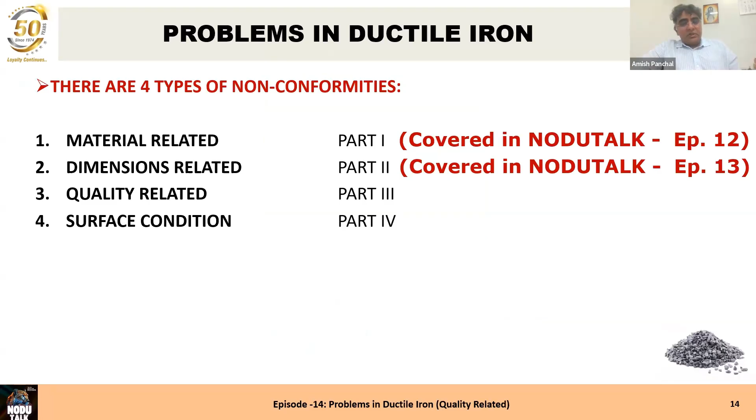Friends, starting with today's 14th episode of Nodutalk, we are going to cover problems in ductile iron which are quality-related. In the past two issues, we have covered other topics on problems in ductile iron. Today's topic is going to be covered by Mr. Henderieckx, who previously covered material-related and dimension-related problems in ductile iron.

This is the content of today's topic: problems in ductile iron that are quality-related. We are going to cover porosity, air or gas inclusions, general inclusions, cracks, destructive testing, and NDT testing. Over to you, Mr. Henderieckx.

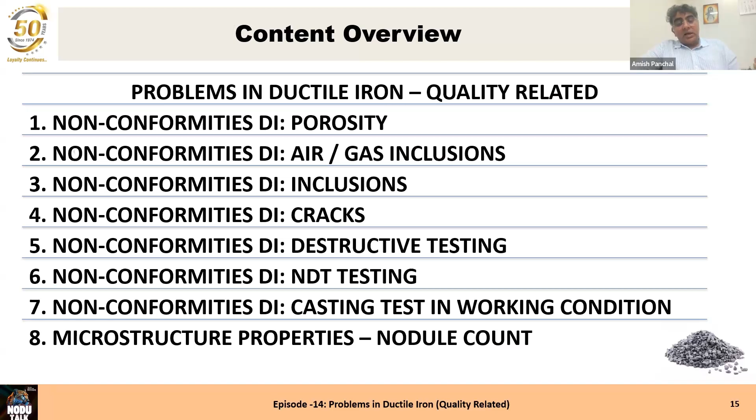Good evening everyone. Today we will talk about the integrity of the casting section, not about the surface but mainly the section. The requirements about the casting sections are given by the customer and depend on the application of the casting. The requirements come on top of the material requirements, and the quality has an effect on the strength and fatigue resistance of the casting, because the material requirements are just about the material, but the quality of the section can influence it very, very much.

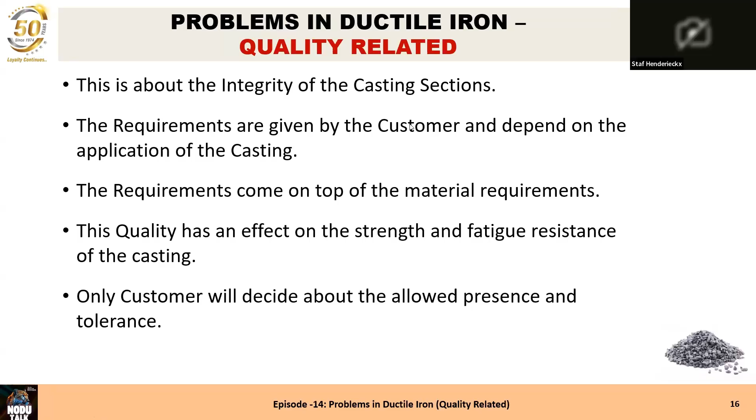Only the customer will decide about the allowed presence and tolerance of quality-related items. The foundry has to accept these requirements as well as the testing methods. I always advise you to ensure that the testing method is available and agreed upon. A requirement stating the casting must be free of any defect such as porosity, inclusions and cracks is never acceptable for the foundry, because nearly no casting will meet this requirement.

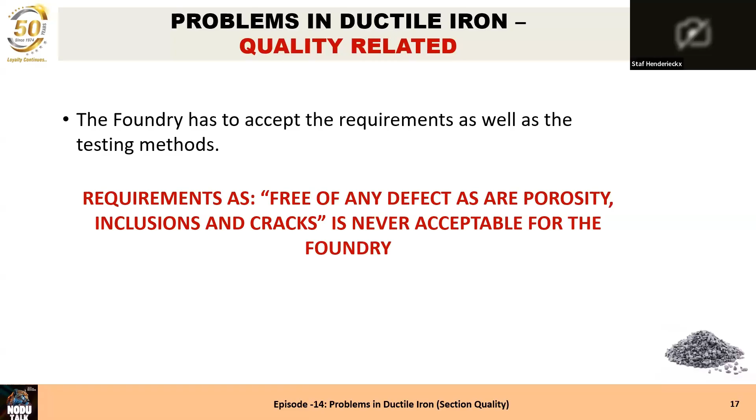It is the same all over the world. A customer who doesn't know anything just likes to put this sentence on his order sheet and his requirements. Please discuss this with the customer before starting. What features do we have mainly?

That's porosity, air and gas inclusions, other inclusions and cracks. These are the four major items involved, and the testing is destructive, non-destructive, and a casting test in working conditions. At the end, we will add nodularity and nodule count because some customers can ask for it, although it's not available in any international standard.

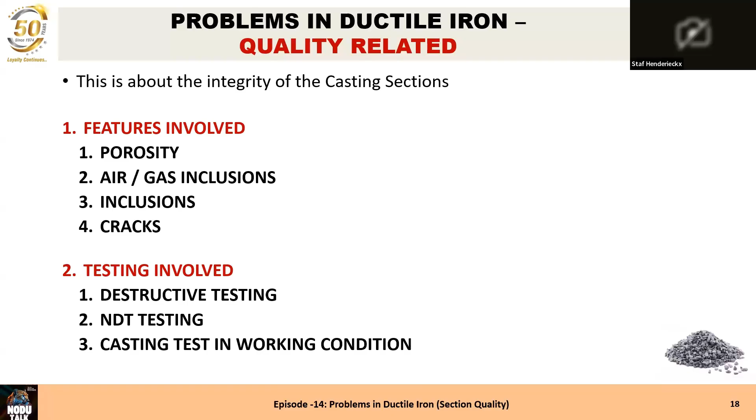So porosity is an area without material due to non-compensated volume shrinkage during liquid cooling and solidification. Every material shrinks during cooling and mainly also during solidification, and if that's not compensated, it will give a porosity.

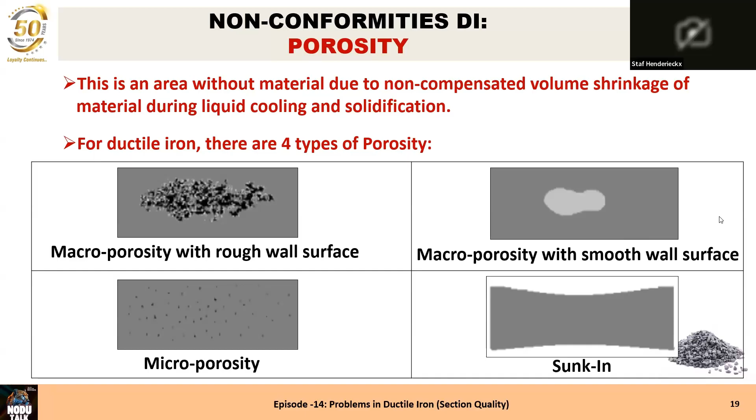We have macro porosity with rough surfaces, and macro porosity with smooth surfaces—we'll come to the difference later. We also have micro porosity. And we have sunk-in defects, which is something that's mostly not recognized by most customers and foundries as a shrinkage or porosity, but it is.

Here we can see some examples of it on a pump casing—a macro porosity and a detail from it. It's small, but it's macro porosity, and under it there's a rough wall surface, but that's not the porosity itself. We can also have open cavity when the porosity reaches the surface, sponge-like porosity, rough irregular wall surface, and surface depression as already mentioned.

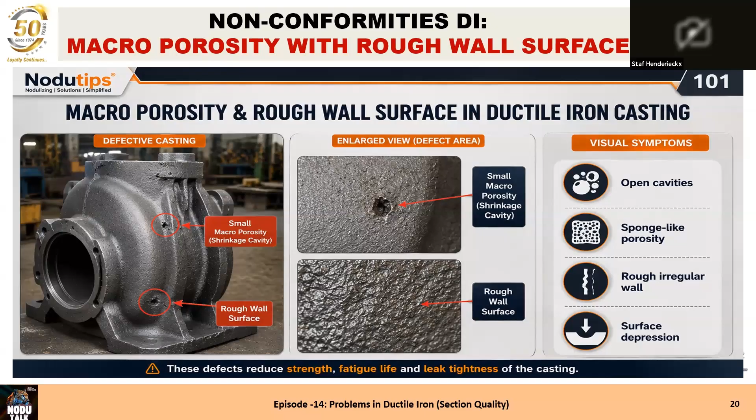Porosity will reduce the strength and fatigue life, but mainly also the leak tightness if used in castings like a pump casing or a valve. Here you see some real porosity—macro porosity with rough wall surface.

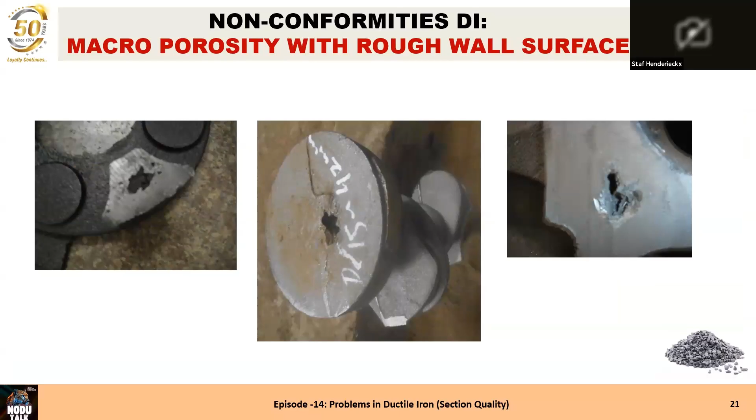This mostly happens when the carbon equivalent is lower than 4.3, but can also happen somewhat higher. Rough surface is mainly when the carbon equivalent is less than 4.3. Here you can see it's many times located in a hot spot, because the hot spot is the last solidifying area, and if there is no compensation, then we have that porosity.

It's for that reason due to insufficient riser activity. If the riser does not deliver feeding metal until the last second, it will lead to porosity, and it's mostly with a lower CE, lower than 4.3.

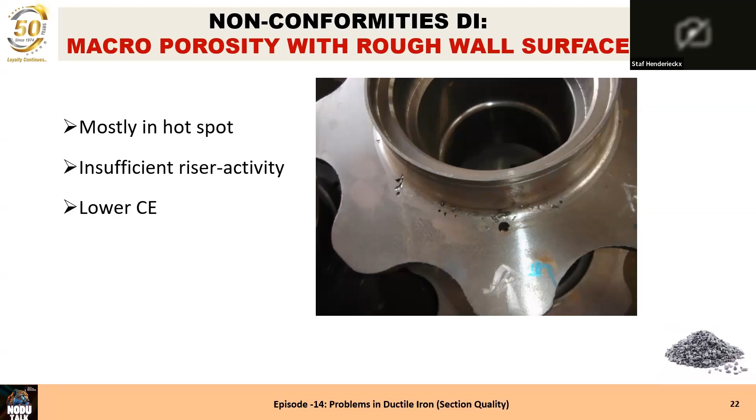If we make an inventory of possibilities: improper feeding and rising is, of course, the main root cause of a macroporosity defect. It's in a hot spot. When we have a hot spot, many times it's not connected with the riser, and if it's not connected, it can have this type of defect.

A low nodule count will also increase this shrinkage tendency, because a low nodule count indicates a low feeding capability, which increases the tendency. High shrinkage tendency can also come from high carbon equivalent and alloy levels, but this is not with a rough surface—it will then get a smooth surface, which I'll come to later. Improper inoculation, of course, if you have improper inoculation, you will have a low nodule count, and a low nodule count increases the tendency.

Improper pouring temperature is another cause, because if the pouring temperature is high, we first have liquid metal shrinkage between the pouring temperature and the start of solidification.

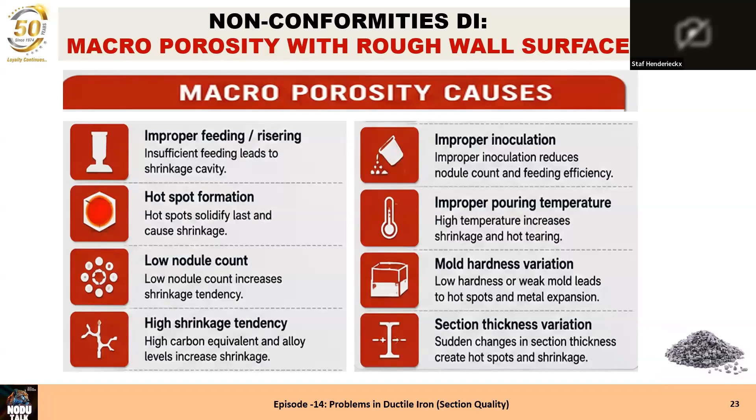When the mold is not strong enough, not hard enough, that expansion will push out the mold, and that extra volume can lead to porosity, macroporosity appearance. Then the section thickness variation - when we go from a thick section to a thin section and again to a thick section, that will block the feeding capacity of risers, and if the feeding capacity of risers is blocked, we can have this macroporosity without any problem.

We have other possibilities. Sand erosion: weak sand is eroded by molten metal flow. That's a rough surface, but it's not a porosity as such, and it will not happen in the center of a section. A poor mold finish - that's again about the surface, and that will be covered in the next session. Coarse sand grains give a rough surface, of course. Low mold strength gives a rough surface.

Metal penetration can occur if the mold is not rammed properly, then the metal can easily penetrate, and if there is no good coating on it, it will penetrate. Excess pouring temperature will also give a rough surface, and high turbulence of pouring will also give a rough surface. So this is a rough wall surface.

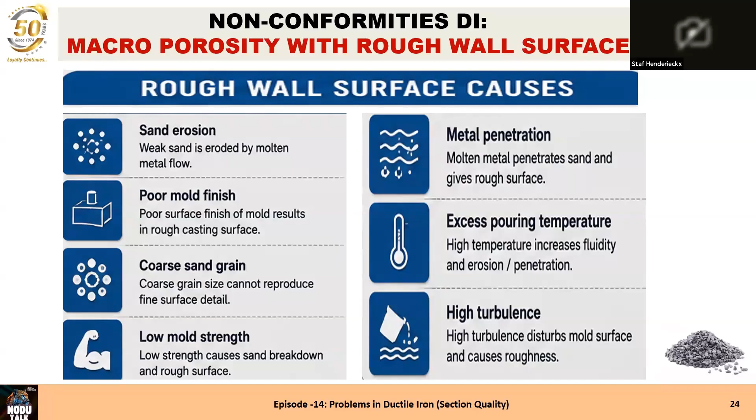It's not really porous. To prevent the macroporosity, on the left in picture 1, we can see it's the riser. The riser is the main solution for macroporosity. The gating system is another factor with influence.

Why? The gating system will decide where the hotspots will be, besides the section differences. Very close to a gate, there will be a high temperature, and it's very important to improve the gating system so that the riser can feed it when necessary.

Pouring temperature is not only a matter of porosity, but also a matter of energy and cost of the casting. Going about 50 to 70 degrees above liquidus temperature is enough for good castings. If you go higher, you will lose energy, you will lose money, and you will increase the tendency to make porosity.

Inoculation is very important because it will decide about the nodule count, and the nodule count is very important for having good feeding all over the casting, because nodule count is directly related with the fluidability and the possibility of the riser to feed all the areas.

And of course, the casting design - you have to discuss with the customer that there are no abrupt section changes, and that the wall thickness differences from one area to another are smooth and not abrupt.

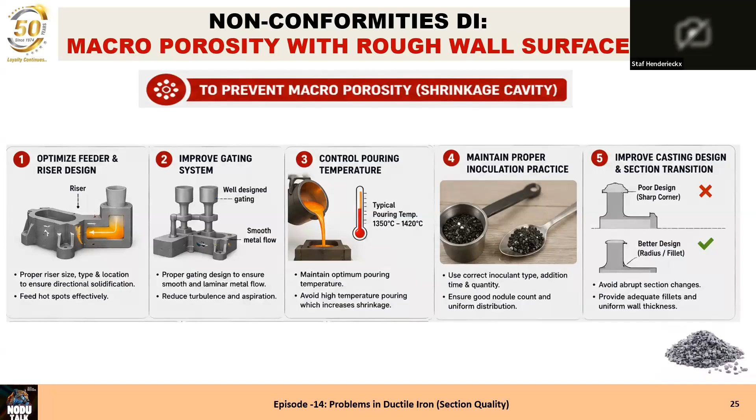Mold hardness - you must make sure it's strong enough, and mainly for green sand you must be assured that the sand is rammed properly. But also in chemical bonded sand, there can be areas that are a little difficult to reach, where the sand is then less good than in other areas, and this can cause problems.

Proper sand quality and grain size of the sand decides the strength of the sand without any problem. Facing sand and coating - the thickness of the coating must be adapted to the thickness of the casting, and it must be applied properly.

Again, pouring temperature and pouring velocity. Pouring velocity matters because when you have too high a metal speed, it can remove some sand and cause a problem. Again, a well-designed gating and runner system is important.

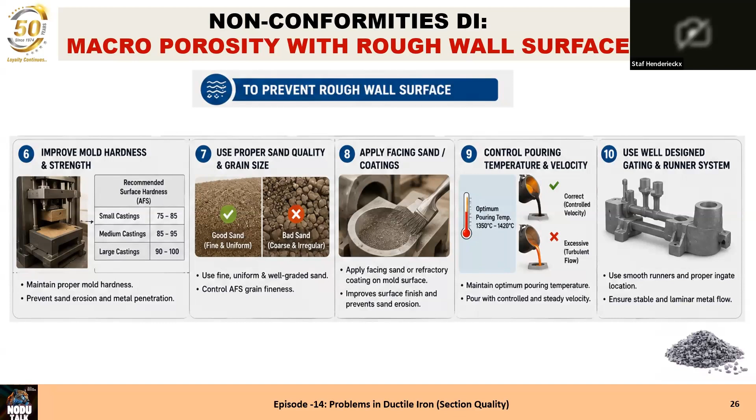If we see here the defective casting, it can be inside, under the riser, it can be in a hot spot. Wherever we see here a macro in the middle picture, you see the macroporosity with smooth walls. It's a shrinkage and it can be open and so on.

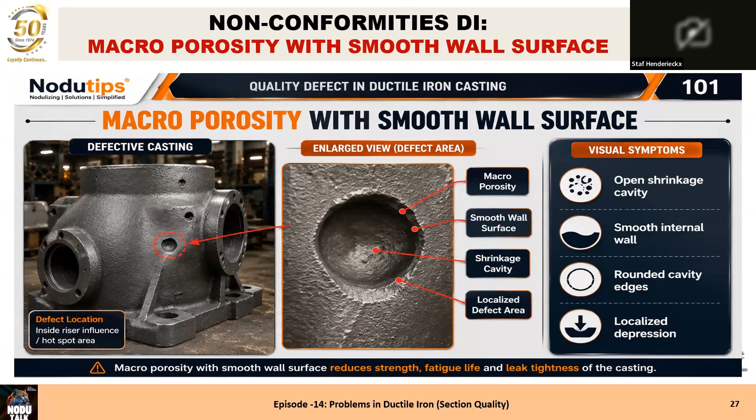When does it appear? We can see it in the next slide. Smooth wall occurs when the carbon equivalent is high. I have the experience that if you have casting sections above, let's say 25-30 millimeters, and you have a carbon equivalent of 4.5, you will get shrinkage with smooth walls inside the cast.

And improper feeding and rising is also a factor here, but due to the high carbon equivalent, the feeding is disturbed and will have problems reaching all areas. The temperature again is very important, and the section thickness, of course, creates an isolated mass or not.

Low feeding efficiency - every riser must be calculated concerning the modulus to make sure it can feed until the casting is really solidified. But the number of risers also has to be calculated, because every riser has a feeding distance, and that feeding distance depends on the section size of the casting, but also on the liquid quality of the casting. The nodule count is mainly very important there. If that's not okay, whatever riser you use can be fine, but the feeding efficiency will not be okay.

With proper feeding neck design, we can now buy risers with a conical bottom for the feeder neck, with all types of connections, to make sure it's okay. A supplier should really provide the proper data for that feeder neck design, so that you will have no problems with delayed solidification.

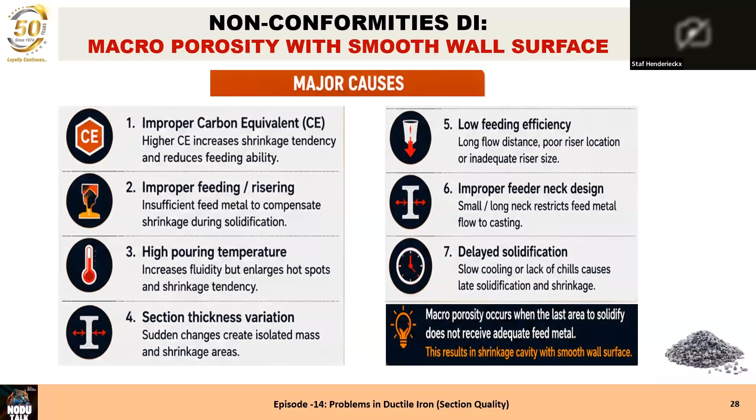Here you see typically how smooth the wall surface is with macro porosity on the left side, and on the right side I have put some pictures. With 4.1 it's more a rough one, 4.3 theoretically it's no porosity, and 4.6 you see it's a very smooth wall surface. If you see macro porosity with a smooth wall, always first look at your carbon equivalent - something is wrong there.

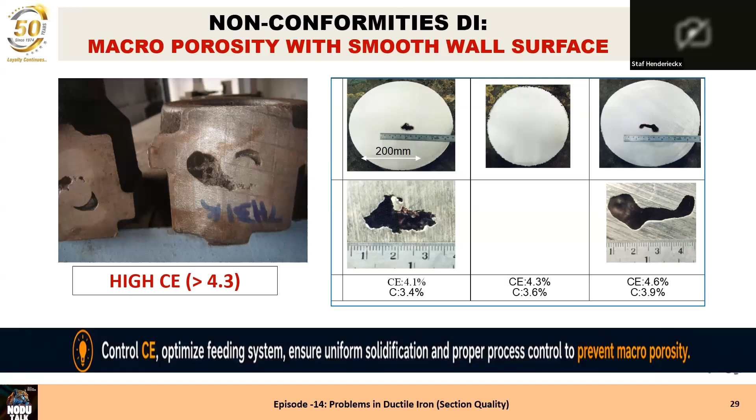Microporosity is very typical for ductile iron castings. It occurs in heavy sections, in the thermal center, and in the last solidification area - that's very important, it always happens in the last solidification area. It's very difficult to compensate because it's in the area where it appears. At the end, there was some shrinkage and the riser could not reach it anymore because there was no feeding possibility anymore, so you get very small defects very close to each other, which can be found very easily by ultrasonic testing.

So it's the most difficult defect or porosity that appears with ductile iron. By definition, it's a fine shrinkage cavity network - it's a network, not one defect. It's more defects formed during the last stage of solidification due to insufficient feeding and localized contraction.

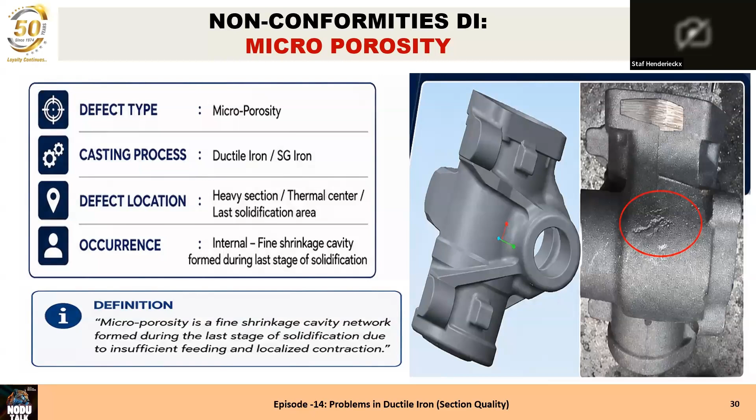How can you see this if you have, let's say, a thermal analysis curve? When you have melted your iron, you plot the thermal analysis curve. If you see that curve first drop down in temperature, then go up a little bit, and then drop down again - when at the end it drops too slowly, that means that at the end, when the last metal is solidifying, there is no carbon anymore coming out of the liquid metal to form nodules. There will be no compensation of this type of shrinkage, and it will lead to microporosity.

So that's one of the defect appearance pictures there - it looks a little bit like a sponge. This seems to be very big, but it's mostly not that big. However, it's there, and it's very dangerous for the application, especially if you have a pressure-tight casting that is pressurized during use - then it will be very dangerous.

Where will it be? At the hot spots, the thin-to-thick junctions, near a riser neck. Anyhow, it's at the last freezing zone, and it can be in a heavy boss section, but please note it's in the last freezing zone where it happens. It will come out after machining, you can see it, but ultrasonic and RT X-ray will show it. Many times you can also see it under the microscope when you take out a sample, and you can see it there.

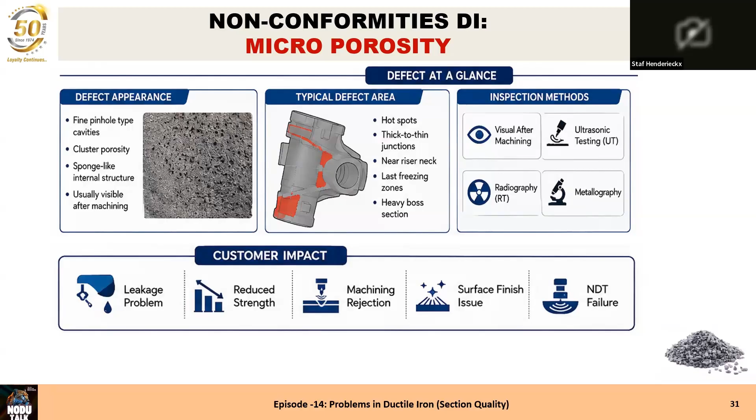Sometimes people think it's about carbon, but it's microporosity. The big impact for your customer is leakage, reduced strength of course, and in machining - when he machines and touches an area where there's microporosity, the surface condition will not meet the requirements anymore, and then it will not be okay. Of course, NDT can already scrap the casting before it's used, but it's a very dangerous and the most difficult porosity in ductile iron.

You can see here some real pictures I have, and you can see a number of them - it's a knit, all small, very small porosity very close to each other. It's mostly far from the riser due to inadequate inoculation. Why?

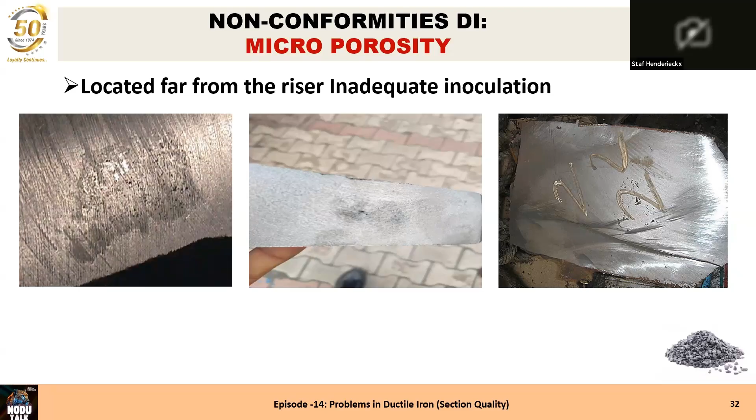If your inoculation is inadequate, your nodule count is mostly too low, and a low nodule count will decrease the feeding length of a riser. You will get these problems at the end of the feeding length or between two risers. When the feeding length of both risers touch each other, then it will be there in the center of the two risers.

Some overview then, where is it possible? The feeding system, of course, if the riser is not okay, it's already sure, and this happens when there is no liquid metal anymore at the moment of solidifying shrinking. In that area you can have it. It's sometimes under a riser because the riser neck solidified and the last solidification shrinkage under the riser is not compensated anymore, and then it's under the riser. That you see in the riser design. If the riser is not feeding until the last moment, it will not be able to compensate this micro porosity.

The hotspot is the last solidifying metal. There you have first micro shrinkage, and if the hotspot is really not compensated by the riser, then it becomes a macro porosity. So in a hotspot, micro is the start of a macro porosity later.

The carbon equivalent, of course - a low carbon equivalent increases the shrinkage tendency and reduces the feeding ability of molten metal. Never forget that the nodule count is very, very important. Inoculation practice, we see it over there. If the nodule count is not okay, the tendency will increase a lot.

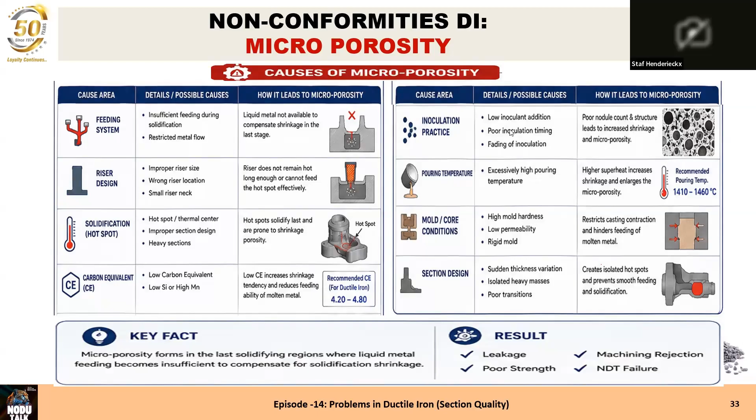The key fact is that it's formed at the last solidifying metal area, and the feeding was insufficient. So it's in between risers. It's under a riser when the riser neck is solidifying too early, and it can be in hot spot sections, but then it's not that big, because in a hot section it starts with micro going over to macro. What's the problem? Leakage, of course, poor strength, machining rejection, and problems with NDT testing.

So you can have sunk in, and many times foundries and even customers don't see it when it's small, but when it's big, you really will see it happen. You can see it in the center picture.

It's happening when the outside of the section is solidified, and there is a layer of solidified metal. The liquid metal in between decreases temperature, solidifies more, and decreases volume, and normally when the surface stays flat, there is a vacuum coming, and the vacuum is that strong that it will suck mostly the upper solidified section down, and you will see a smooth, small or bigger sunk-in defect.

When the remaining section is still sufficient for the customer, it's no problem, but sometimes the remaining section is not sufficient anymore. And sometimes there is a machining stock, and due to the sunk in, the casting cannot be machined all over because there is too much machining stock in the center, and then the customer will also not accept it. It's a localized shrinkage.

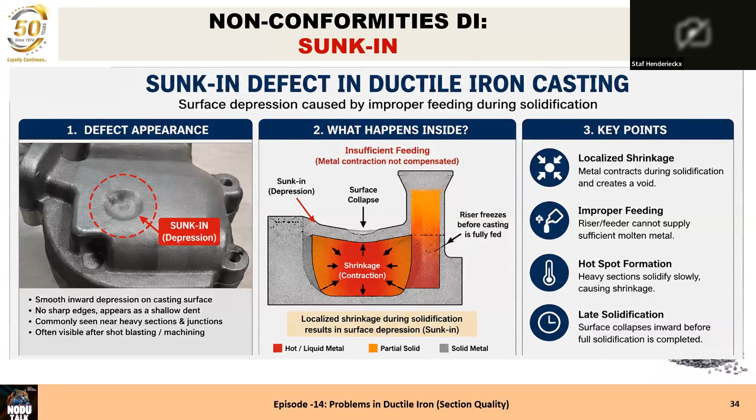You need the outside, the metal in contact with the mold, to solidify quickly, so that there is a small thin layer of solidified metal which will later cause this sunk in. It's about improper feeding, it's about hot spots, and again late solidification, but not as late as micro shrinkage. It's in between the first solidification and the last solidification.

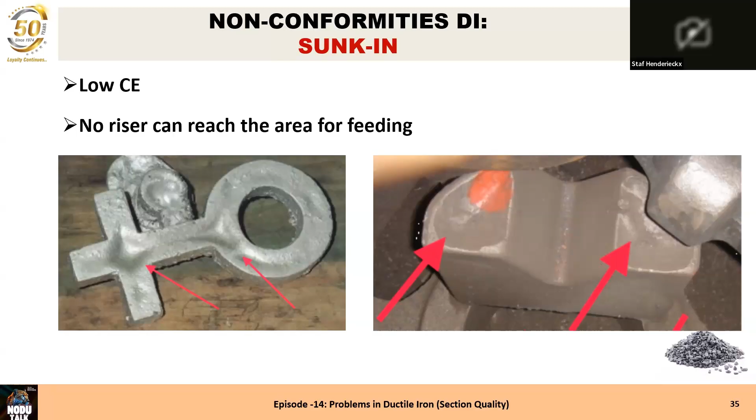It has to do with low carbon equivalent. Why? Because to get a solidified layer at the outside in contact with the mold, it needs a CE lower than 4.3, because then we first get a layer building and later the nodules come out. You get it in thin-to-thick junction sections, in bosses mainly, in heavy ribs, in a flange, but mainly when there's a thicker area around a riser - but not that much.

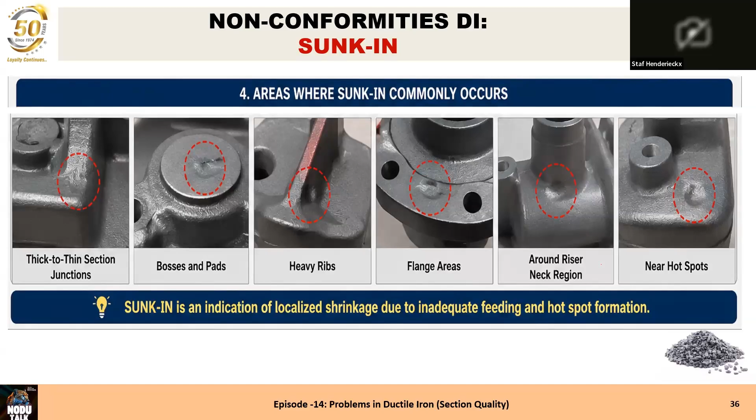There I saw it very few times, near a hotspot. It's an indication, if you see it, that localized shrinkage is not being fed by the riser at the moment of solidifying. It's improper feeding, of course. It's always about feeding - every porosity is about feeding.

A high temperature can also be a reason, because then total shrinkage can be much more than expected. A low mold hardness, again due to the expansion during solidification, it's possible that we have extra volume. A hotspot is a very dangerous area for any type of porosity.

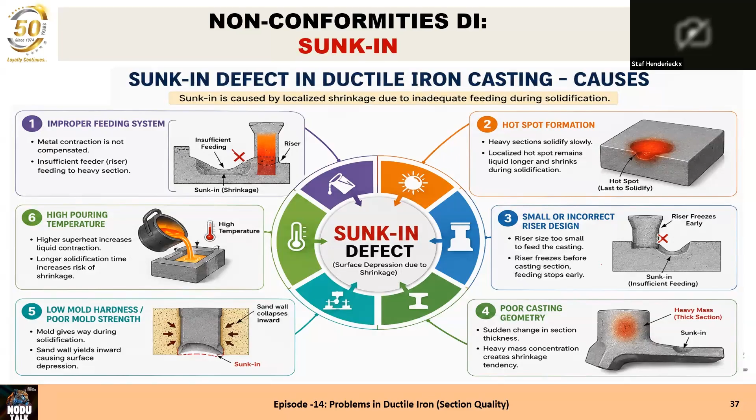An incorrect riser design, when the riser neck solidifies very quickly, then the risk is very, very high that you get that sunk-in. And the casting geometry is also important, because if the feeding length of the riser is not sufficient, you can get a sunk-in over there. That was about porosity.

Now we have air and gas inclusions. Can be inside the section or at the surface. Air inclusions are mostly due to incorrect venting, especially when they appear on top of the casting. Gas inclusions are due to the mold or the core, because some of the sand hardening systems will burn at around 500-600 degrees C temperature, and at that moment there will be gas.

If the casting is not solidified at that moment, the gas can enter the metal. Gas and air will always float up to the top of the casting, but if the metal temperature is low or the casting has a complex shape, it can be located all over inside the section. Most of the time they appear only when machining is performed, and then it's not making our customer happy.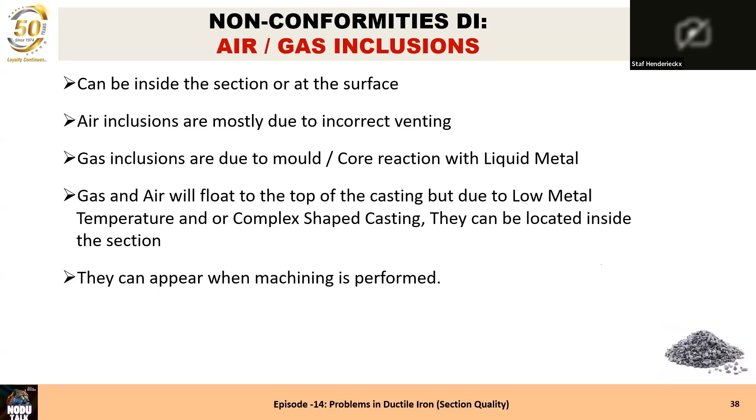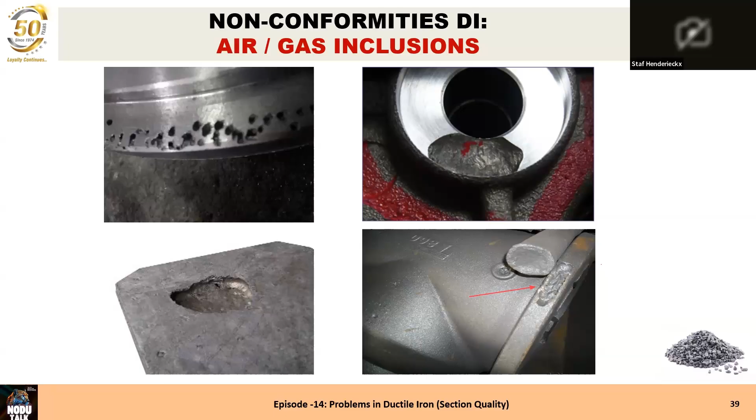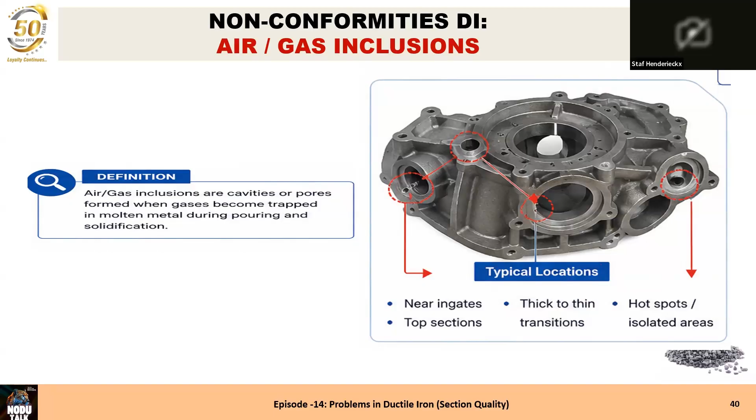You will always have a smooth wall on this defect, because it's gas and air, and gas and air doesn't make a rough wall of the defect itself. Where can it be? It can be near the ingates, mostly at the top sections. It can be where there's thick to thin transitions, and it can be at the hot spots. But let's say in 60 to 70%, it will always be on the top of the casting.

When you have that, then it's mostly about a core or a mold making a lot of gas in a concentrated area, and there it comes out, and the rest of the casting is fairly good, but somewhere it's due to burning of the mold or mainly the core. It's round and elongated, smooth internal. It's mostly found on a machined surface, as well on top as inside, when there is a core involved. Can occur as isolated pores or clustered porosity, and it's usually dark in appearance.

For shrinkage porosity, it's really not dark, but with gas and air, it's mostly dark. The problems you can have are, of course, leakage, reduced mechanical strength, machining issues, and definitely your customer will not be happy.

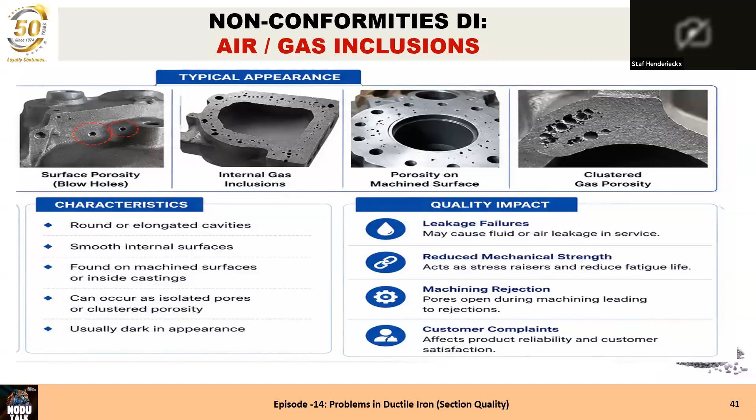How does it come? It's turbulent pouring of gas. An excessive pouring height can increase the problem. An interrupted or non-steady pouring stream - that's one of the most frequent reasons for this. An improper gating design - and with gating design we also mean venting, because by gating we mean the complete system, and the venting is really very important.

And a high pouring temperature means that the gas or air can move all over, and the high pouring temperature can penetrate the coating from a core or the mold, and when it's penetrated and the hot metal comes in contact with the core, you will have gas from the core. So pouring temperature is very important here.

Metallurgical causes, of course, high moisture. I don't have to tell you guys in India that during the monsoon season, it's a very frequent defect that every one of you, let's say, happens and appears. Excess of dissolved gases, H2 and N2. The H2 is caused from the humidity. And the next one is poor melt treatment, but the poor melt treatment is mainly the slag removal.

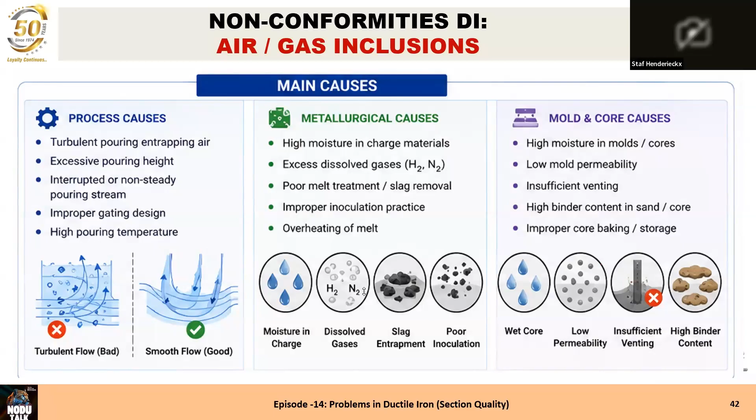So inclusions, we have put them as others because inclusions are physical things like sand and slag and all the non-metallic materials - slag, oxides, dross, sand, and everything else that can be entrapped and remain in the casting after solidification. Sometimes filter particles are also one of these inclusions.

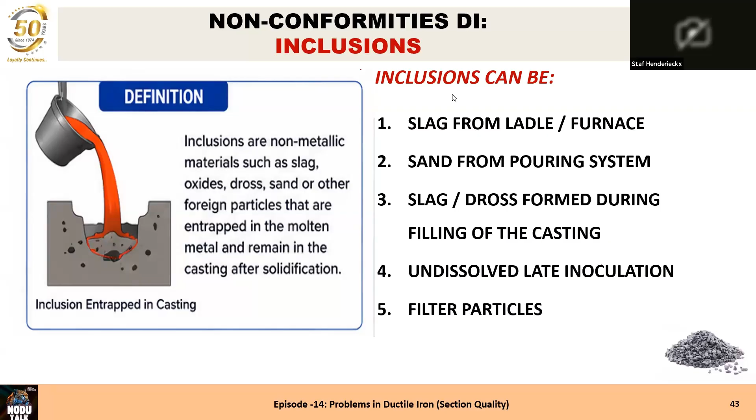On the right side, we can see the slag can come from the ladle or the furnace, meaning it's deslagged very badly. It can also be sand from the pouring system due to the high pouring speed and the high metal speed inside the pouring system. It can be slag or dross formed during the filling of the casting. Dross is nearly always present in ductile iron, because dross is a combination of magnesium, silicon, and oxide, and it will always be there. Sometimes you can have undissolved late inoculation, and on the other side, as I mentioned, filter particles.

So where does it go? Let's say on the top of the casting, if it has been floating up very properly, it's near the ingates - meaning it just entered the casting and could not move anymore. It can be in heavy sections where there is a big amount of metal last solidifying, or in the last filling zones, meaning that when at the end you pour in some slag, it will end up in the last filling zone of the casting.

And many times it's around core prints and cores who have a different section thickness, a very thick section to a thin section - then it can be that it breaks there, or the coating is not proper and the liquid metal will break out core pieces and send them into the casting itself.

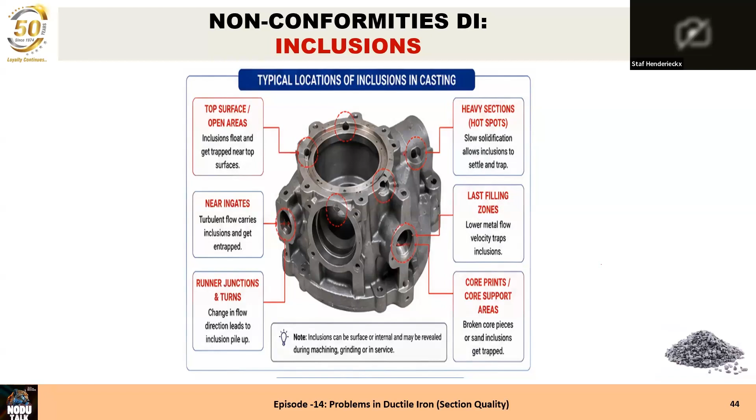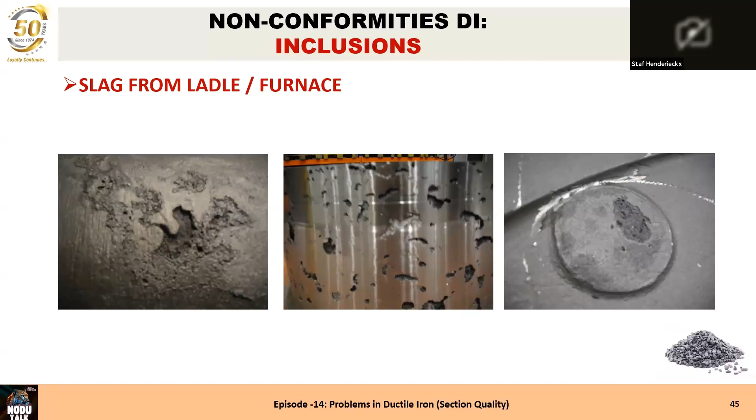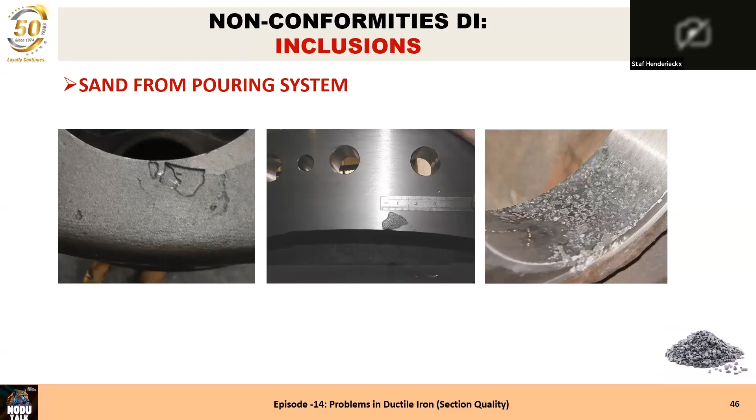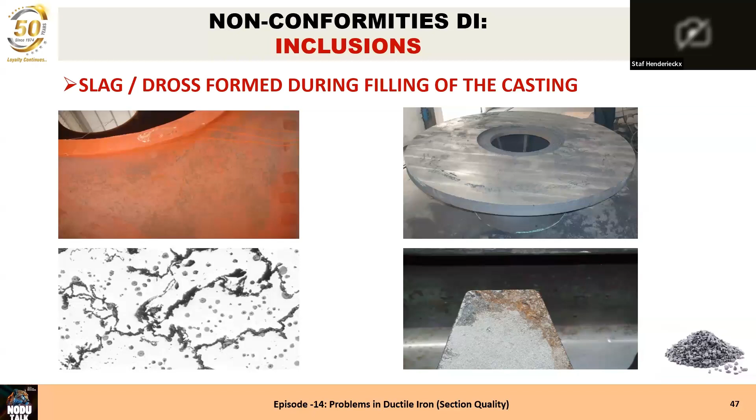Dross is always a long, extended indication of magnesium silicon oxide inclusions. The rest of the casting, the nodules are perfect, but you see the dross there in between. On the right bottom side, that was a casting with a lot of dross, and that's broken open to show it - you see again that it's the dross going to the top of the casting. Yeah, that's undissolved late inoculation.

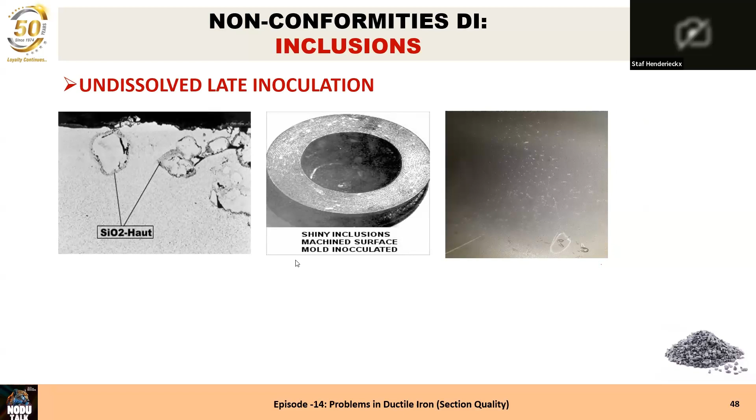You see all these white spots all over - that's inoculation that is not dissolved properly. And this is filter particles.

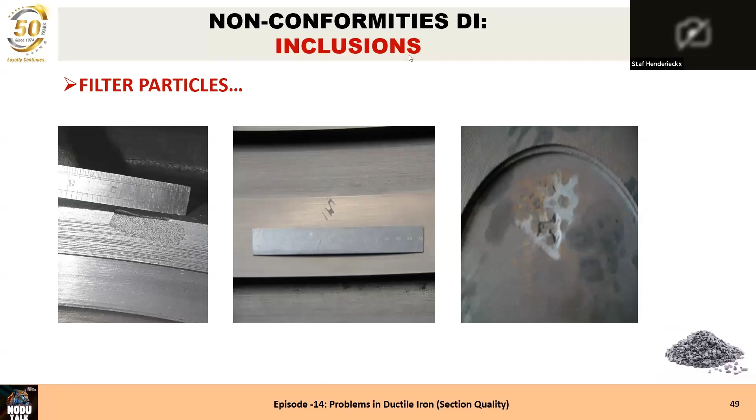But you can be sure that filters that are not properly added, or properly produced, you can get a problem with them as an inclusion.

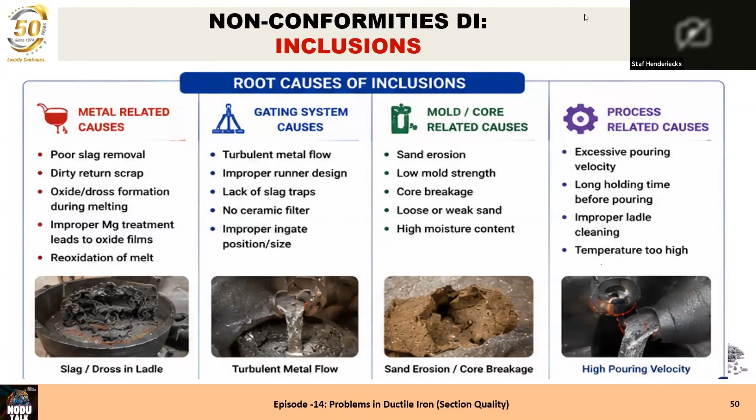High temperature is always a negative thing. So with cracks, you have the hot crack and the cold crack. What's the difference? The hot crack is initiated at the time or just after the time of solidifying, meaning it happens when the metal is solidifying but has not yet enough strength to hold the stress of shrinking, and then it can happen.

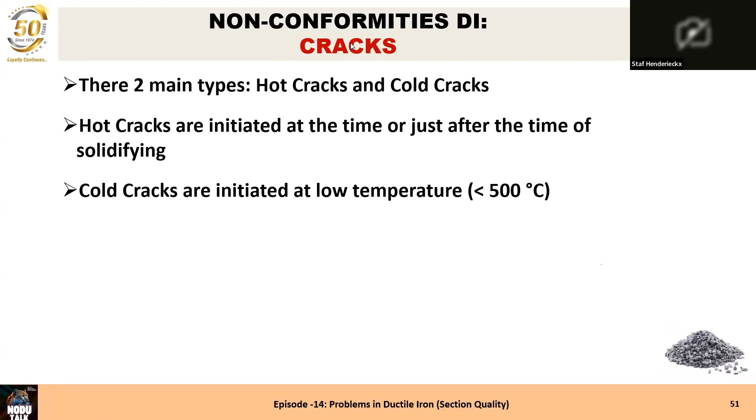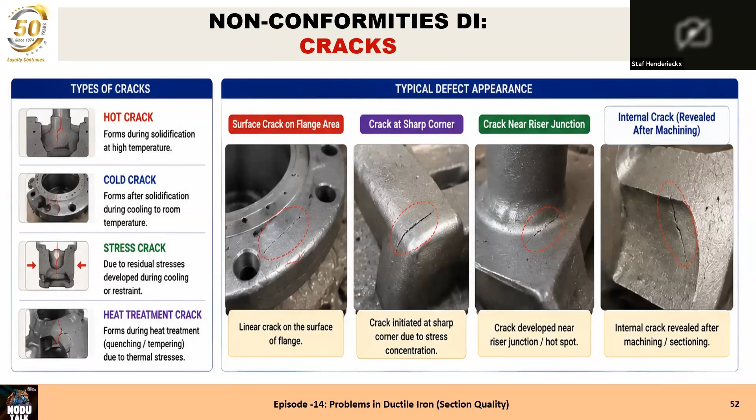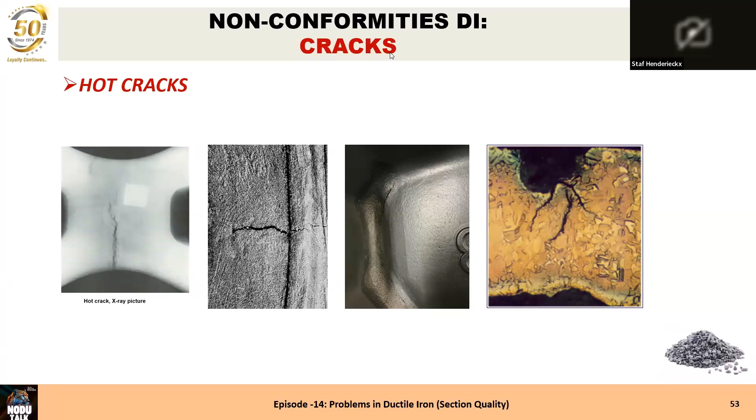You can see on the left side that's a hot crack X-ray picture. The second is a hot crack seen on the casting itself. The third one also, and the fourth one also, and that's due to defects. The fourth one, the right one, is due to defects, so that it cracks to the outside.

Cold cracks, you can see them much better - they are mostly closed, much more closed than hot cracks, and it has to do with lack of shrinkage. It has to do with heat treatment, and with stress during the cooling, in the mold, so that it hinders the shrinking and it cracks. You can see it there at the bottom.

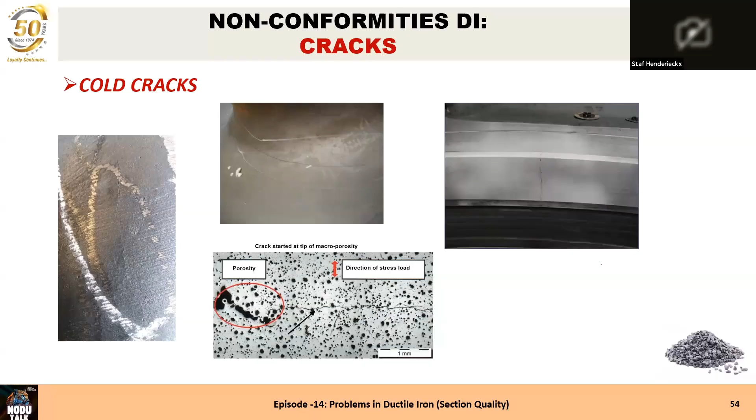You had the porosity over there, and from there the crack starts - it's a stress crack. Again, where it happens is at sharp corners, or, most importantly, where the section thickness changes, and when that change is very abrupt, that's one of the things that really causes it.

Core prints are also many times related to a crack. Near a riser, you then have a hot crack. Rib junctions and bosses are a matter of difference in section sizes. And in heavy sections, you can have hot spots during the cooling.

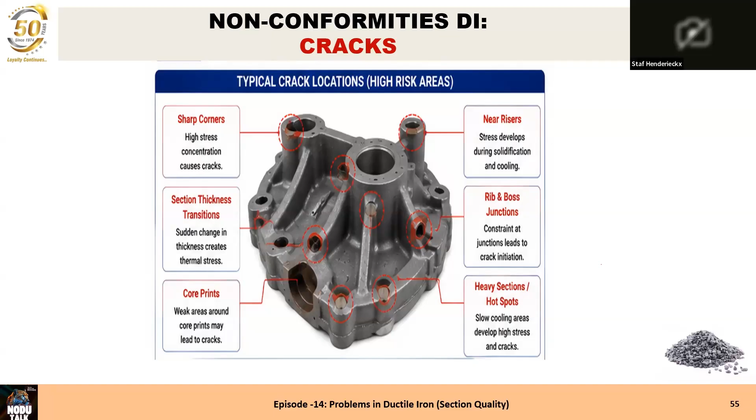Now, I must say that cracks are much less frequent in ductile iron than in steel or gray iron. Where are the root causes?

Design-related: sharp corners, insufficient fillet radius, sudden section changes, unbalanced design, and restrained contraction. These are all potential causes.

Metallurgically, a high carbon equivalent variation - the higher the carbon equivalent, the more possibilities for defects - and other defects can, during further shrinking and cooling down, start cracks. An improper nodularity is also known to cause this - the better your nodularity, the fewer problems with cracks.

Carbide formation can also act as a starting point. A low magnesium level means the same thing - if you have a low magnesium level, you have improper nodularity. And poor inoculation - when the nodule count is very low, the crack grows very quickly, because a crack grows from one nodule to the other. If there are only a few nodules, the crack length will immediately be higher, and the higher the crack length, the quicker it progresses.

Process causes uneven cooling, of course - you need a difference in temperature. Excessive mold restraint, which you have mainly with chemical bonded sand, sometimes makes it impossible for the metal to shrink, and then there will be a crack.

Low pouring temperature - I shouldn't call this a crack, but it can be, let's say, a cold crack, in the sense that two metal streams touch each other and there are some oxides in between, so they will not connect properly. So it looks like a crack, but it's a different cause, due to the low temperature.

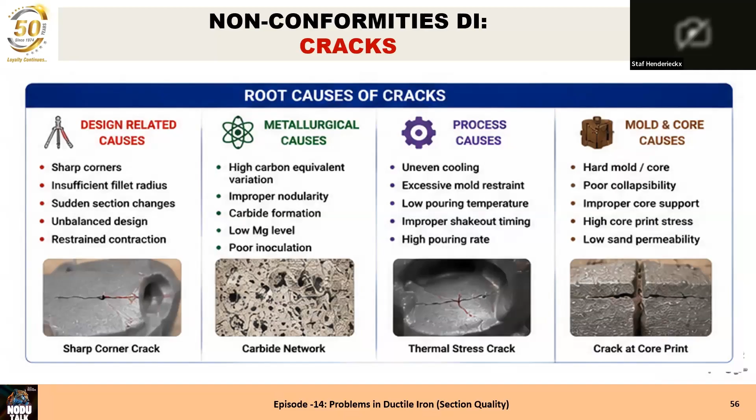Mold and core causes, a hard mold or core, poor collapsibility, so the casting cannot shrink. Improper core support can also cause high core print stress, and if that stress is really high, that's a possibility. Low sand permeability means everything stays in, and you get more inclusions, and if you get more inclusions, the crack can start much easier.

Test methods: you have destructive testing.

The first question is by Mr. Suresh Babu: we are producing ductile iron bracket samples for a German customer, grade 450-18. Tensile strength, yield point, and elongation are safety characteristics in the drawing. Your suggestion on the chemical composition to be followed? The weight of the casting is 38 kg and average section thickness is 20 mm. I always start with a chemical composition as mentioned in the Sorel publication. They have a publication there, and depending on different wall thickness, I'm sure Kastwel must have it.

There are suggestions you have there, and I always start from that, sometimes I change a little bit. My starting point is always the suggestions in that Sorel sheet. So, Mr. Suresh Babu, we will share with you the composition available with us, and you can unmute yourself. If you have taken the trial and faced any problem, you can describe that, so Mr. Henderieckx can give a proper answer. Please let us know your problem, and then we can find out what small modifications we can do to get a better result.

Yes sir, am I audible? This is for a German customer. They want these three characteristics as the minimum requirement in the drawing: tensile strength, yield point, and elongation. All three have to be achieved. So we are trying with high silicon, low manganese, and low copper. We are pouring some test bars, but we are achieving only two of the three parameters. If you achieve tensile and yield, elongation is missing. If you achieve tensile and elongation, yield is not achieved.

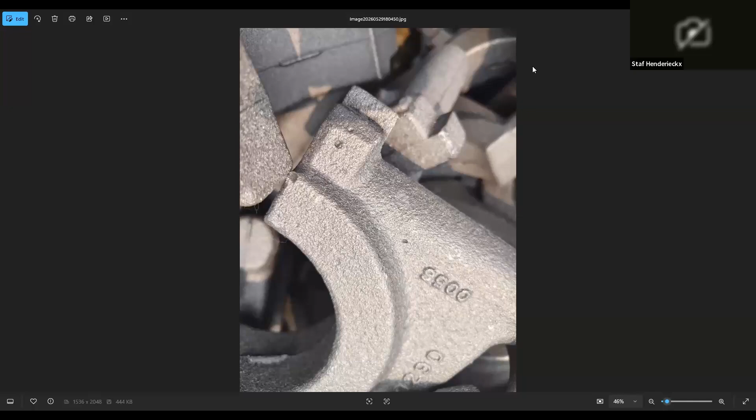The ramming of green sand is very, very important. Why? At a certain moment, when ductile iron is solidifying, when the carbon is coming out to form nodules, it expands. That expansion, depending on the section thickness of the casting, is mostly higher than the strength of the green sand. If that strength of the green sand is low, it will be pushed out somewhat, and you lose extra volume that cannot be compensated later anymore.

If it happens at one of its foundries and maybe not at another, first look at how good the green sand is rammed. What's the hardness of the green sand? Secondly, don't put a higher carbon equivalent than necessary, because the higher the carbon equivalent, the more the expansion will be, and then even sometimes chemical bonded sand cannot withstand it. So it's a matter of comparing the hardness of the green sand with the carbon equivalent you're using for these parts.

There is one more question: what should be the last box minimum pouring temperature for SG iron and machine molding? This has been asked by Mr. Chandrasekhar Veerabhadran. I have the experience that I should never pour at a temperature lower than 70 degrees above the liquidus temperature.

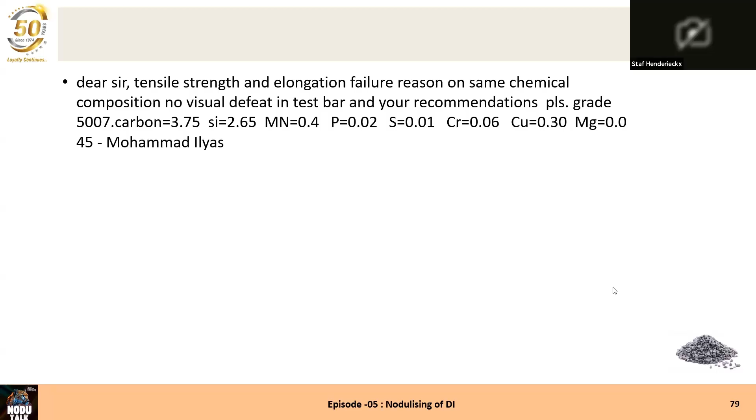Mr. Vijay Purohit has asked: normally to improve the yield, the sleeve is placed directly on the casting, and in such case we found flakes below the sleeve. So how to avoid it?

If he finds flake graphite there, that most probably means he has a breaker core under it, or it's related to the riser - I can give some possibilities. If there is flake graphite under the riser and the other area of the casting is still okay, that can only be one thing: there is a reaction of the riser sleeve or the breaker core with the metal, and there is something in it that causes it. I don't know exactly what.

I know that several breaker cores have a reaction with the metal and react with the magnesium, so that it ends up with flakes, because it's too long liquid over there. But it has to do with the riser sleeves - some suppliers do not have a good riser sleeve for that. In Europe we have had that problem also, and I don't recall exactly the point, but there was a certain product in the riser sleeve that was good for making it function, but that reacted with the metal and made flakes. There must be a reason why a nodule becomes a flake there, and that can only be by an interaction with something - the riser sleeve or the breaker core.